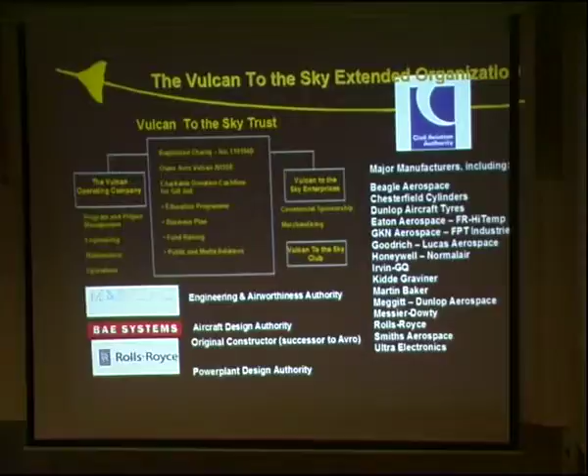The Vulcan to the Sky Trust. The Waltons couldn't get the money out of the lottery grant because they weren't a charity or anything, so the trust was formed to actually run the project and do the project, and they bought the aircraft from the Waltons. They're the ones that look after the education, the gift aids, the bits and pieces. Then what we have is the operating company, which is myself, the engineers, and we do all the work on it.

And then on the other side is the enterprises. They do all the various bits of the fundraising and the shop and hopefully some nice bits and pieces.

But one of the most important things underneath there is the Vulcan to the Sky Club. It's a club run by extreme enthusiasts of the aircraft, and it's the largest aviation club in the world. There's over 7,000 members now, which doubled last year once we got the aircraft flying again, and it's well worth the money. Half of your subscriptions that you pay to the club actually go to the aircraft themselves. They do various fundraising, and you get various magazines.

I've got one or two magazines down here, I haven't got many of them. Leaflets, news, updates - there's 3 or 4 coloured brochures you get every year. There's various talks and visits and all that as well. So by joining the club, not only do you help the aircraft, but you actually get something for yourselves as well, which I prefer instead of just trying to hit you for money all the time.

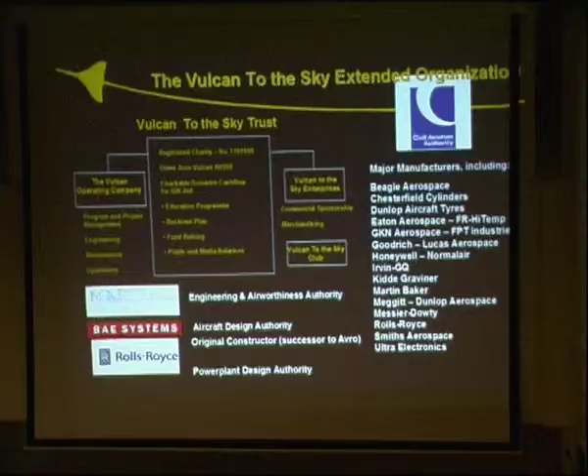As I said, there's all the main players we've got there. BAE Systems, they are the design authority - they bought Avro out, so obviously they're involved. We have Marshall's Aerospace, they're the engineering authority. Obviously there's only 4 or 5 of us engineers on the aircraft, we weren't a big enough company to do it, so the CAA had to stipulate, we had to get a major company in to back us. And then obviously Rolls-Royce for the engines.

And then up at the top we have the Civil Aviation Authority, who obviously oversees everything that goes on. And so these are some of the manufacturers that we had to trace down and get them on board to actually help us do all the work.

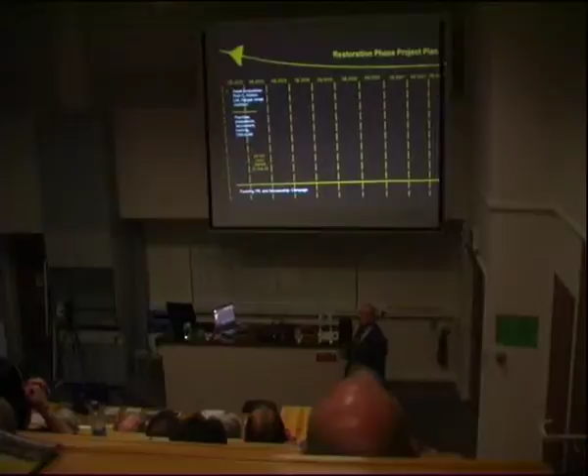Okay, so the timeline. We started back in 2005 - from the initial one about 2000, 2001, we didn't actually physically start on the aircraft till 2005. And obviously the CAA had to come in and audit the facilities and everything, make sure it was right. It took us about a year just to do the inspections.

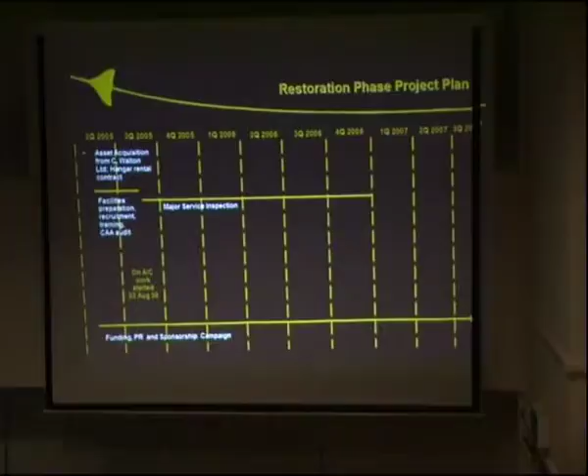What they stated was, not only did we have to do a major servicing that was required, but we had to do an enhanced inspection on all the wiring and all the systems. Every component that moved, rotables or whatever, had to be removed and go back to the original manufacturer. All the fuel pipes, oxygen pipes, hydraulic pipes had to be removed from the aircraft and replaced. If they couldn't be replaced, they had to be cleaned, flushed and refitted again.

Every single wire had to be inspected as far as possible, and there's only 14 or so miles of it. And it's actually, the cable is Pren, which is the old rubber base, like the old household electrical wiring.

I'm lucky. So, and then it took about a year as well then to do the rectifications and all the functionals, because we had completely stripped this down to the shell, so we had to rebuild it all and then check it all out. And then obviously the flying part towards the end of 2007.

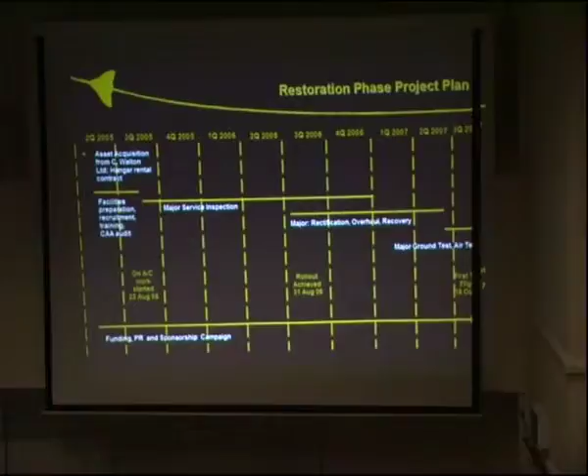Now, a little tour of where we are. There she is, down at Bruntingthorpe, sat in the hangar, nice and pretty. If any are ever across Leicestershire, they actually do hangar tours on a Sunday between 10 and 4, so you're more than welcome to go around. And there's also another Cold War museum down there as well.

Okay, the team that did the major - it took us just over 2 years to do the major, and on average it was about between 50 and 30 of us. And that's from the engineers, the marshals, technicians, logistics, admin staff, and whatever. And so that's most of us all there. And that's so many people used to do it down at St Athan.

Needless to say, it only took them 10 to 12 weeks, and they had everything in stock, on the shelf, and they all knew what they were doing. They'd spent years actually working on the aircraft down there. On this project, there's only 2 of us that have ever worked on the Vulcan before.

Back to school. What we had to do, again by the CAA, we all had to do a training course. We started off with a 3-week introduction course, so we could learn the basics - this is the front, this is the back, mind don't bump your head.

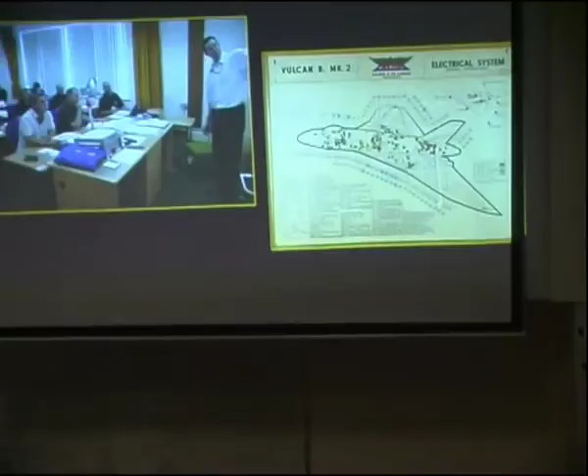So we could actually go and work on the aircraft, and then we had to do another level 3 course. The level 3 courses go into the systems to the same depth as licensed engineers do for the 707s, 747s, the Airbuses. It's a type-rated course, which again took another 9 weeks, or a couple of months in the classroom. We were lucky enough to have some of the old technical training boards, from the 1960s, and especially on the electrical boards, they had relays that you could move over and everything. Ever so handy - still use them now and again.

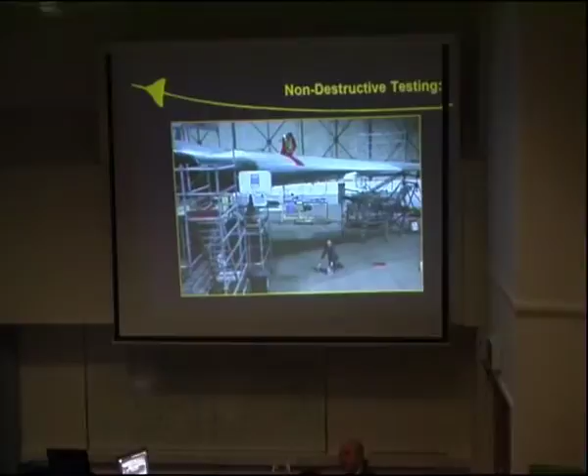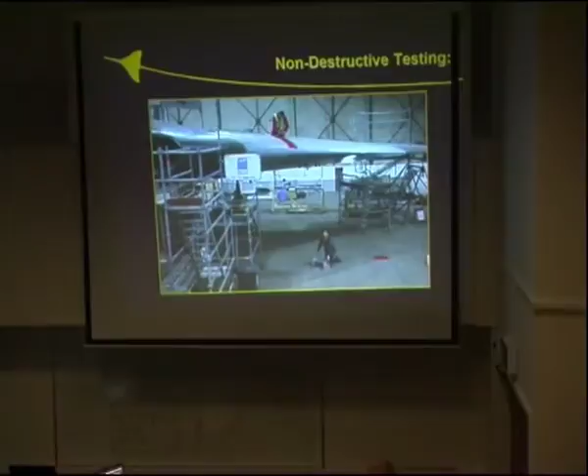Non-destructive testing - obviously we needed to x-ray and check out the aircraft. It had been in service for over 30 odd years, and they knew where the problem areas were, so we didn't bother reinventing the wheel. We just went and x-rayed the bits that they normally x-rayed and found no problems at all.

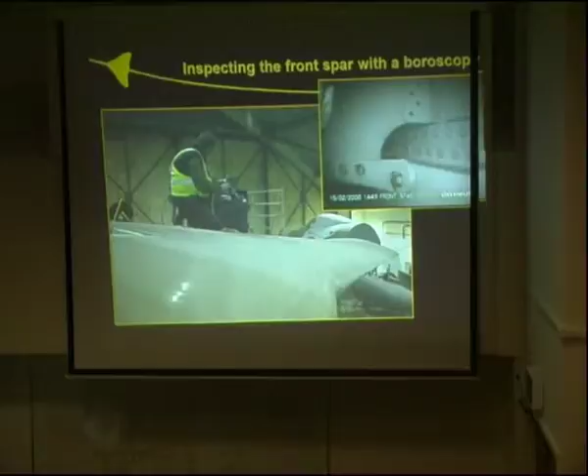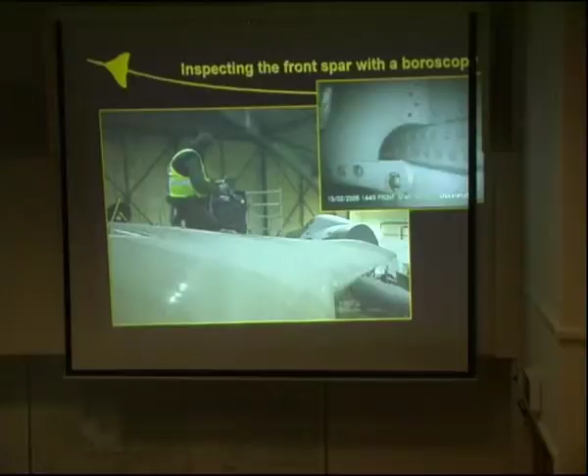But what we did do then is go modern technology - the old boroscope, videoscope and all that. Like the doctor's one with a little light and camera, you can get to places. Where you're actually looking is right down the front edge of that leading edge there, somewhere we would never be able to get to unless we totally de-skinned the aircraft. And as you can see, that disgusting corrosion there.

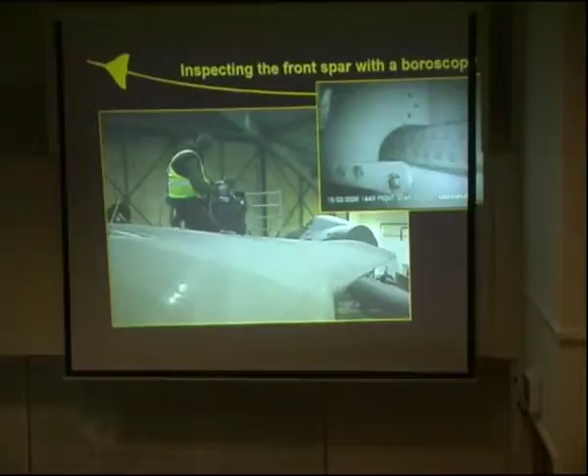Generally, for an aircraft that's nearly 50 years old, it was in excellent condition. We did find some corrosion, which I'll come to later, but generally it was in good condition.

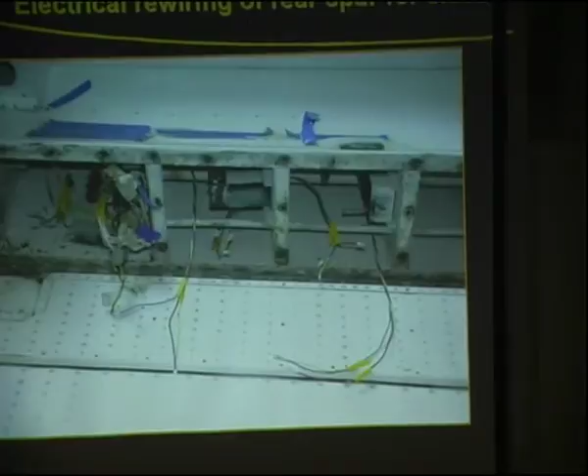As I said with the wiring, this is the flying controls. Being the crew chief, and I'll be flying in the aircraft, I just rewired these as a matter of course, just to be on the safe side. But all in all, we rewired nearly 5 miles of wiring. Where it was in the undercarriage bays and exposed to the atmosphere, it just broke away now. But where it was in the main cabin or down conduits, it was in excellent condition, so obviously they're still there.

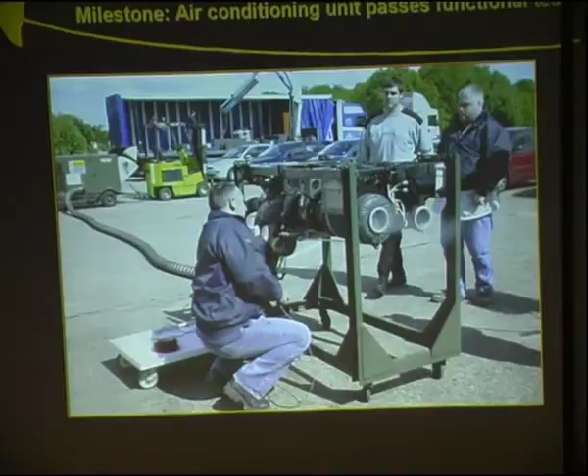Spares - so we bought over 800 tons of spares with the aircraft, so we had lots of some stuff, not much of the others.

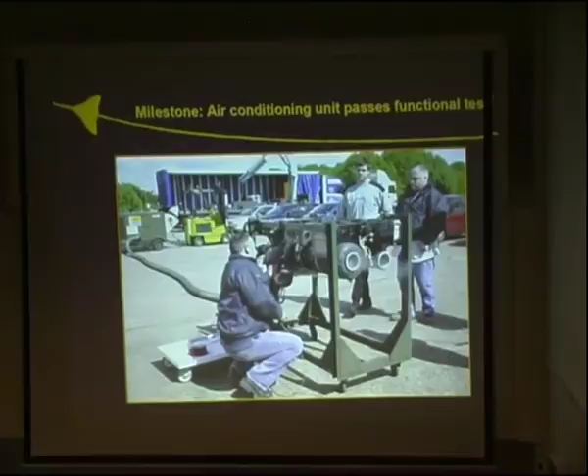Now in the last year in the display team, the aircrew were forever complaining that the air conditioning wasn't working on the aircraft. So they'd be coming down, middle of the summer, hot day, flying low level, doing a lot of work - it was quite hot. Now the air conditioning unit used to work up at 50, 60,000 feet, basically warming the air up a bit so they could have cold air in the cockpit. So obviously when it's low level, it's not very efficient, but they were saying it was really bad. So we operated the valves, everything seemed to be working. But when we actually took it out to do the maintenance, we looked at the cold air unit and there were no blades on the fan.

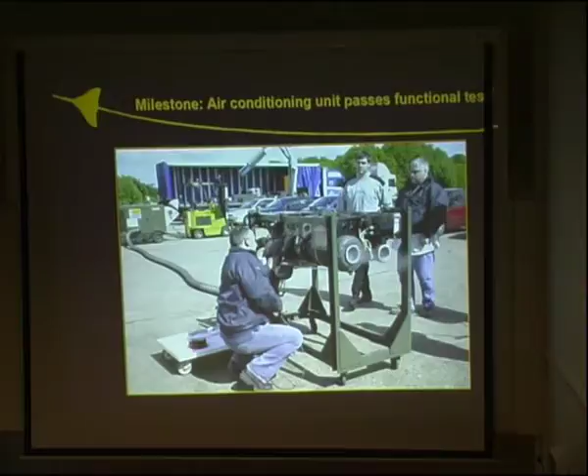So we were as good as stuffed - we didn't have any spares for it or anything, so I thought, oh well, they'll just have to do without it. They did in the last year. But one of our volunteers was actually down in our deep store looking for something else, and came across a brand new, freshly overhauled air conditioning unit, and we've just hooked that up to our air starter, and as you can see there is actually cold air coming out of there now. The aircrew are still saying it's a bit warm, but I think that's their age.

Fuel tanks - 14 fuel tanks on the aircraft, holding 74,000 pounds of fuel, which is around 30 or 40,000 litres I think, and they're all bag tanks. Some of them were perished and all that, and the OEM actually reverse engineered and built one or two of the tanks, but generally they were in a good state.